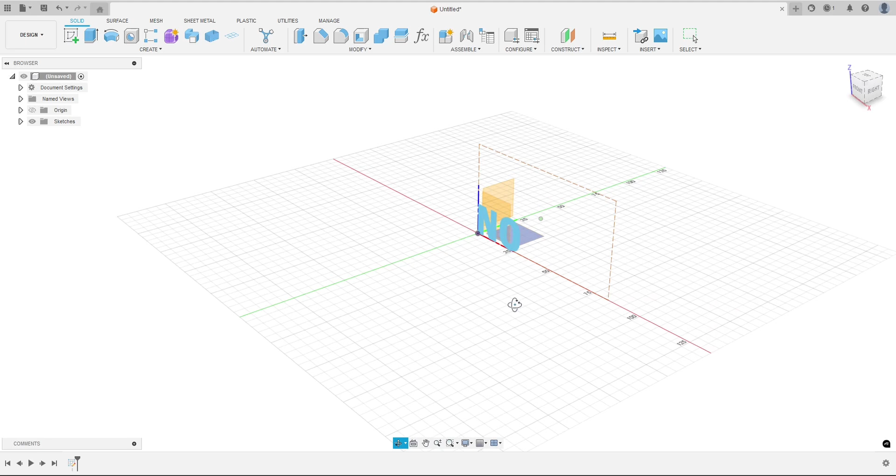So let's do another sketch, and this time we're going to go on this plane, the one adjacent to it. So we've got the front, and now we will have this one.

Same thing, I'm going to get into my text dialog. I will hover over the origin, click, and drag out, and I'm going to type in 'yes'.

Now this is what you want to make sure: you want to make sure you are aligned left, not in the middle or right. And then when you get into text, you'll be on the top, you want to make sure you're on the bottom. We want everything to kind of start from this bottom left corner. And let's hit OK, finish sketch.

So now you should have something like this. Okay, so let's extrude this out.

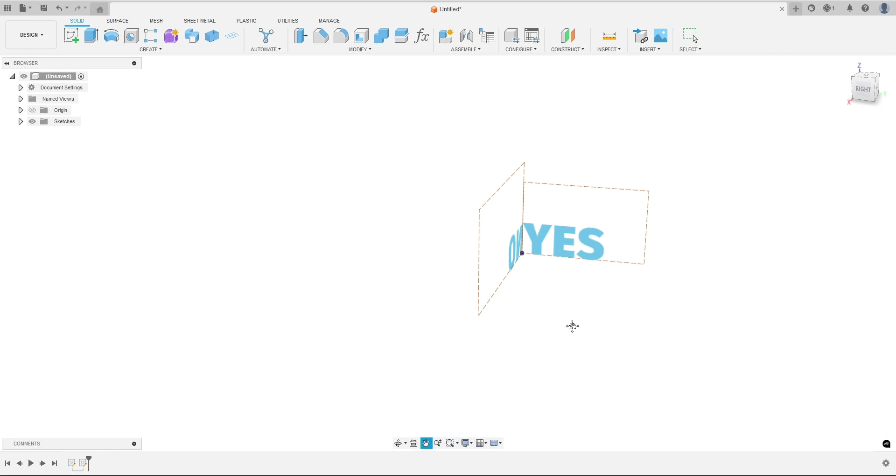So I'm going to take this text, I'm going to hit E for extrude, and I'm just going to extrude it past the 'no'. It just has to go past the 'no' right here. And I think it does. It does, so hit OK.

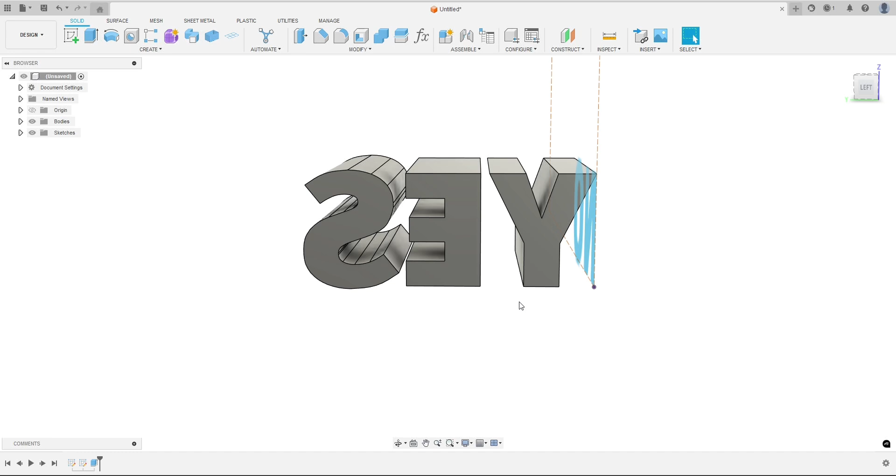And then what we're going to do is move these bodies so they're touching each other, because we want to combine them into one. So let's hit M for move, click on this E, and you can just put it to translate here.

You might be on free move, just switch to translate, and we're going to just scooch over. So we did -1 there, let's just do -2 and hit OK.

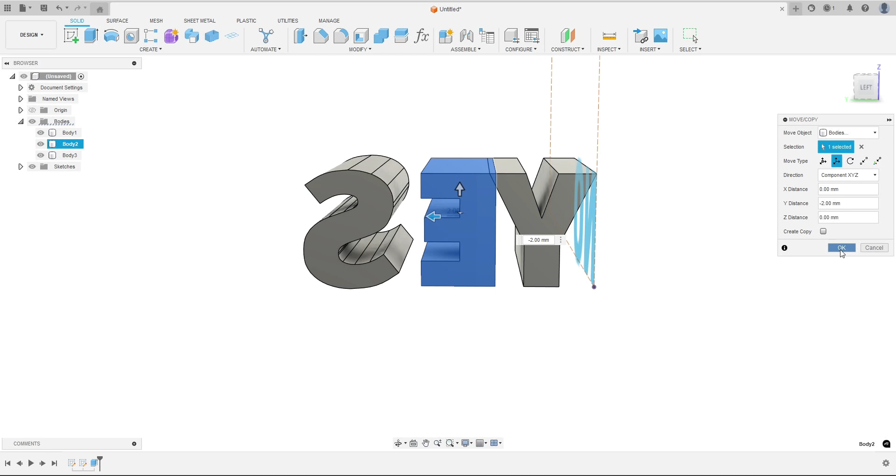We want to move each one the same distance. So let's hit move again with the S. Well, -2, see, -2 doesn't quite work. Maybe it doesn't matter if it's the same distance, we just want to make sure these are all touching so we can combine them, and hit OK. That doesn't look too bad.

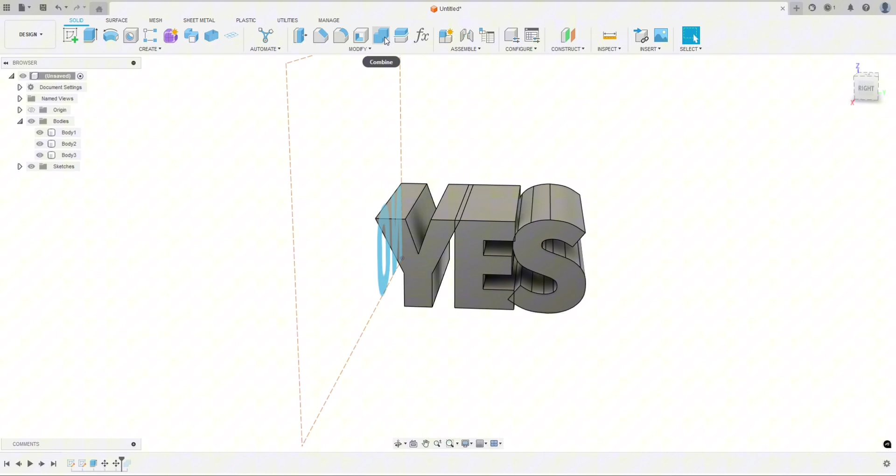Okay, so from here we want to combine these letters into one body, which is why I moved them so they were all touching. So let's go up to the combine tool. We will have the target body right here just be the Y, and then the tool bodies, which is what we're going to combine to the Y, will be the E and the S. We do not need to keep the tools, so uncheck that and make sure operation is set to join, and hit OK. Now once you do that, you should just be left with one body, which is the 'yes'.

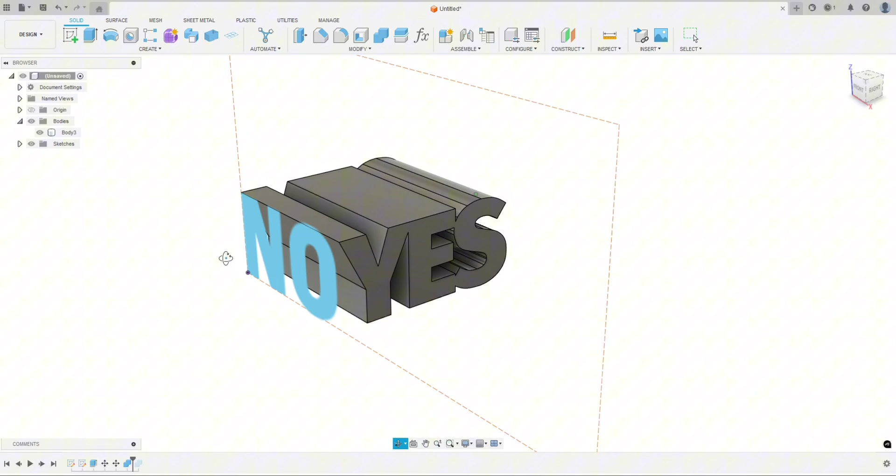So let's hide the 'yes', and now let's not hide the 'yes' yet. Now let's extrude the 'no'. So hit E on the keyboard after you select your text, and just move this back so it's past the other.

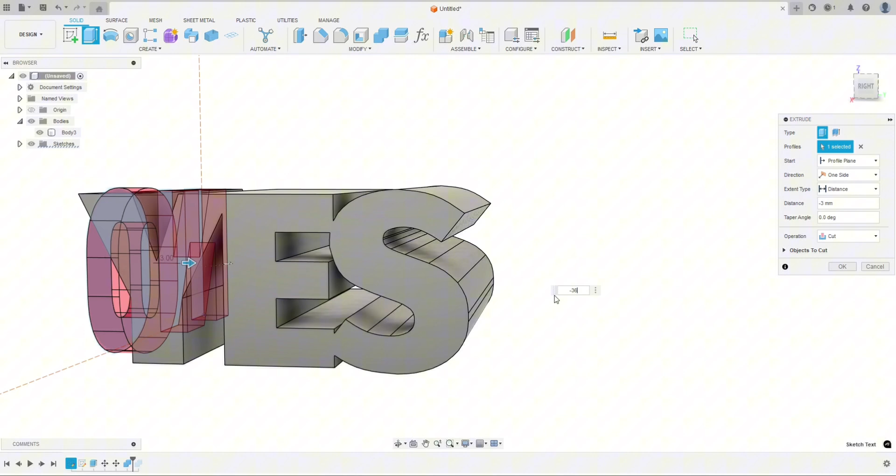Let's just go -36 for good measure, and there we go. And we do not want cut, we want new body, and hit OK. And we can hide that 'yes' now.

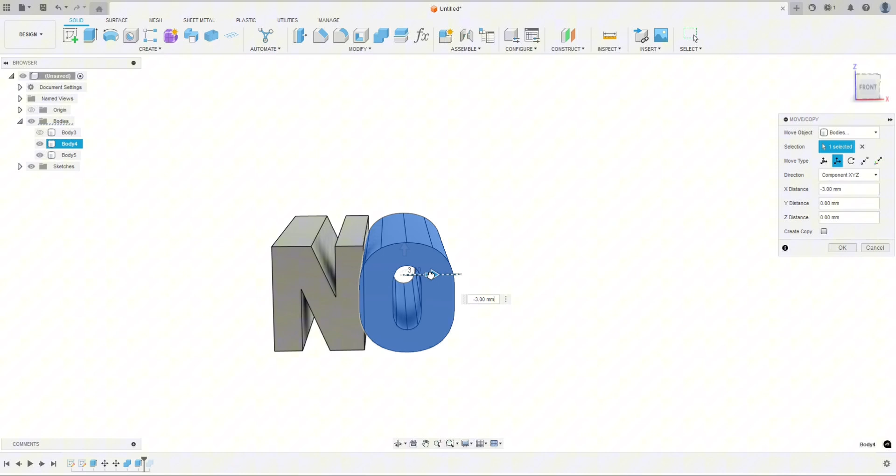And same as before, let's combine these two bodies here. So hit M for move, click on this O, and we'll just drag this over. Looks like -3 is probably fine, hit OK. Combine tool, and combine these just like last time.

So now we should have a NO and a YES. Okay, so how do we cut these out from each other?

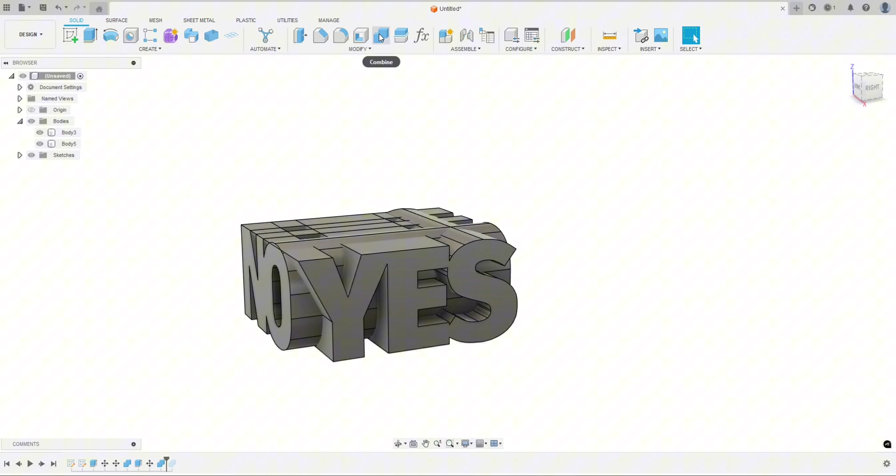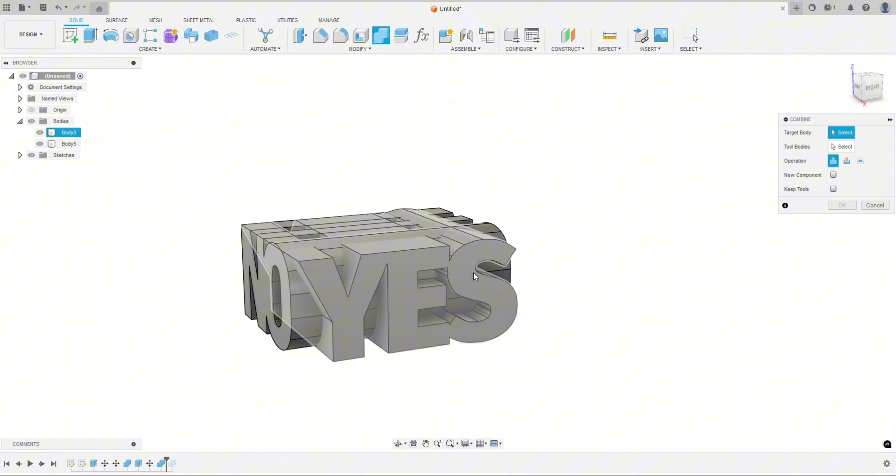Well, that's pretty easy, we are just going to do the combine tool again, except this time we are going to do intersect. And what intersect does - obviously combine or join joins the bodies together, cut will cut one body from another body, and intersect will basically just keep the parts that are intersecting each other. So every part of these two bodies that are touching each other, it'll keep, and everything that's not touching, it'll get rid of.

So we'll just do the target body as the 'no', let's make sure intersect is on, and then the tool body will be the 'yes'. We do not need to keep the tools, and we can hit OK.

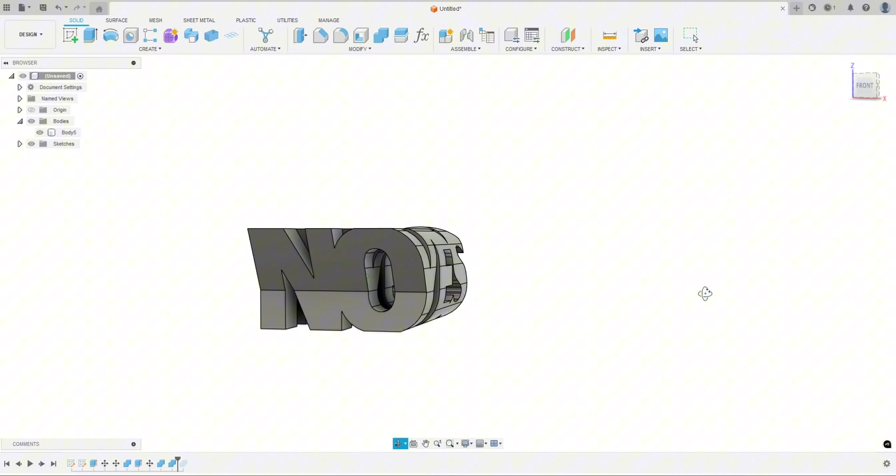And so now you can see from this side it says 'yes', and from this side it says 'no', which I think is pretty cool.